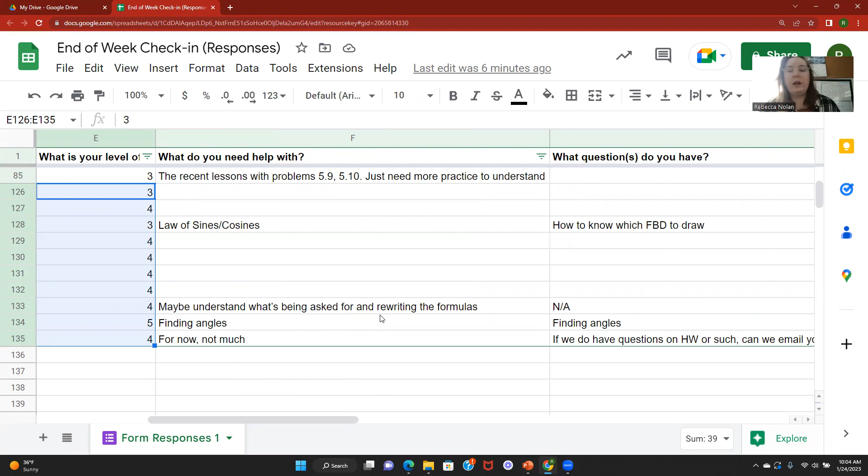Being asked, what's being asked for in rewriting the formulas - I think that has to do with the problem solving methods. Free body diagrams - how do you know what free body diagram to draw?

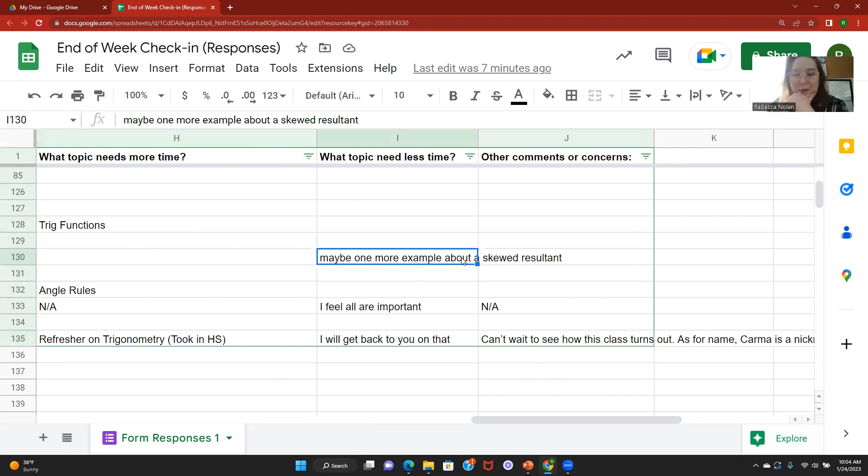A little more review on the trig functions and angle rules. Trig, took it in high school - I think that's the case for a couple people. Skewed resultant, I think this is more time.

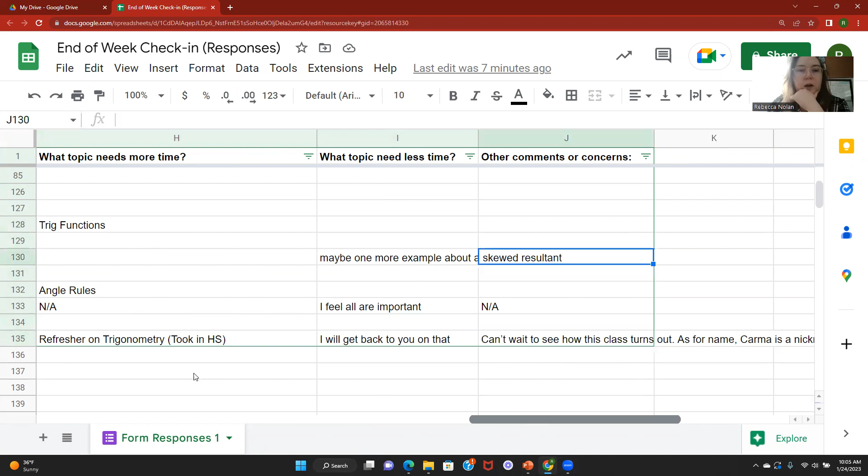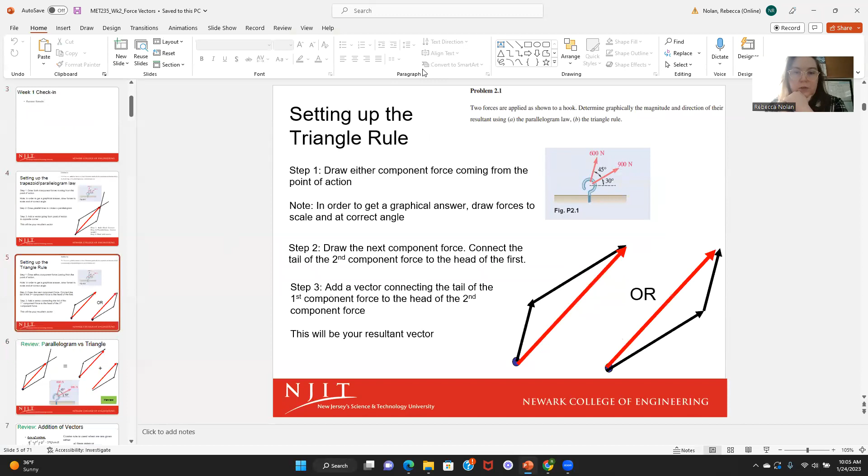Okay, perfect. Let's see, I think I have a few review slides in the beginning. We didn't really have much on setting these up, much in terms of questions on it. So just know that these are in your Canvas slides if you want to see a little more review on triangle or trapezoid - I think that was also in our last week's slides as well.

Okay, when we look at this - I mentioned in class that when we look at R equals P plus Q, the second line here, those should all have that vector symbol on top of it, just that line. That's saying that we're taking into account both magnitude and direction.

Our law of cosines, the way we write it standard, most often, and the way we'd see it on probably a test, and most often on our homework, is R squared - meaning our resultant squared - equals P squared plus Q squared minus 2PQ cosine B. P and Q are our component forces, and B is the angle - B or beta, sometimes I'll go back and forth between the two. It's the angle opposite the resultant.

If we were looking for - if we had all of our side magnitudes, and we had, say, angle A instead of angle B, then we could set up our equation as Q squared equals R squared plus P squared minus 2RP cosine A. So you can move that around - if you had this angle but were looking for a different side, you'd have to rearrange your equation and so on.

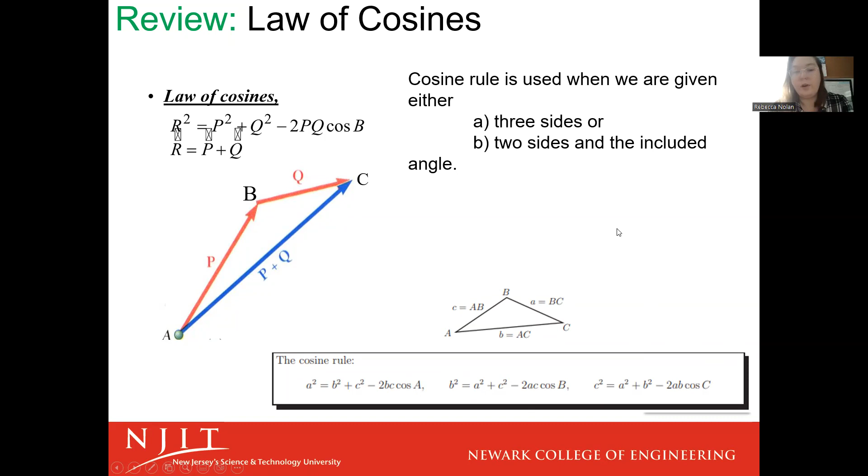We wanted to see a little more of this, so here's the different versions. If you were to have B as the resultant force, usually our resultant force is going to be larger as long as our magnitudes are complementing each other, and the other two vectors are complementing each other. This middle one is the one we're most used to seeing, but we could see it in other formats for other angles.

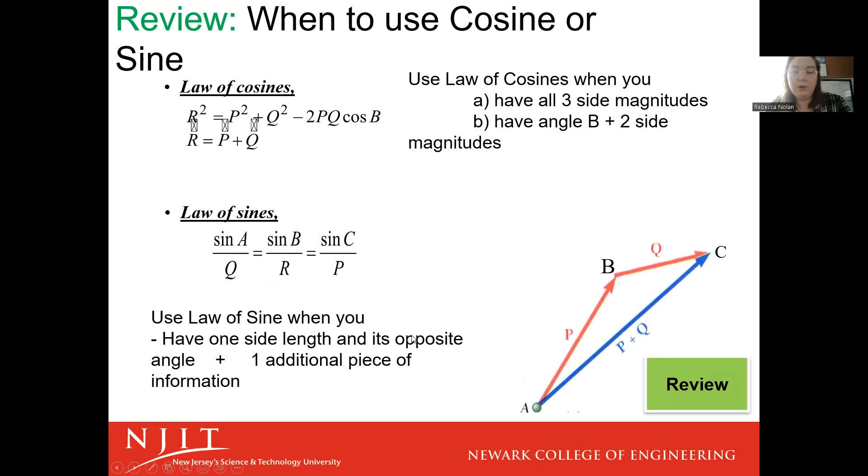The law of cosines. Let's see if we can get a problem with one of these things, and see what we have at the end.

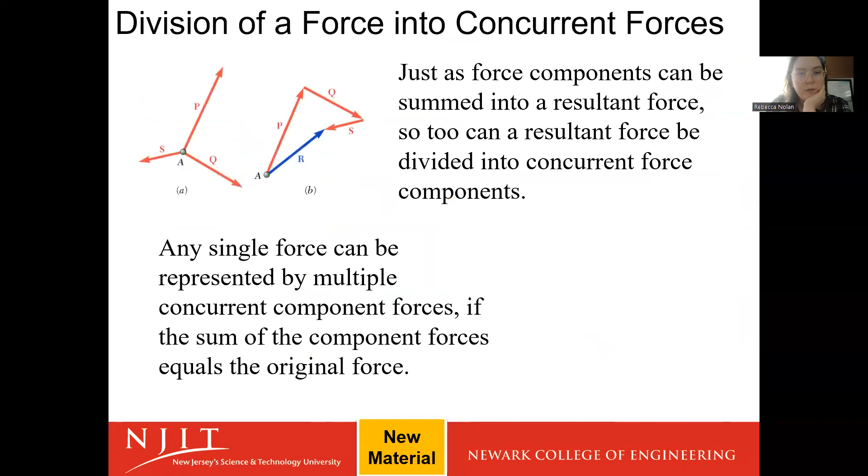I'm just going to keep going in order of the slides. We can revisit law of sines and law of cosines to go deeper. That may be a Friday thing.

We mentioned when talking about our Cartesian coordinate system, that's our standard X and Y, that we've talked about things going completely in the X direction, completely in the Y direction, or some combination of both.

We were also talking week one about taking component vectors and adding them to create a resultant vector. Now picture we can do the opposite as well—we can go from one resultant vector, a combination of two other vectors, into its two parts. An example that comes up frequently, making it easier to solve problems, is to break a force into its X and Y components.

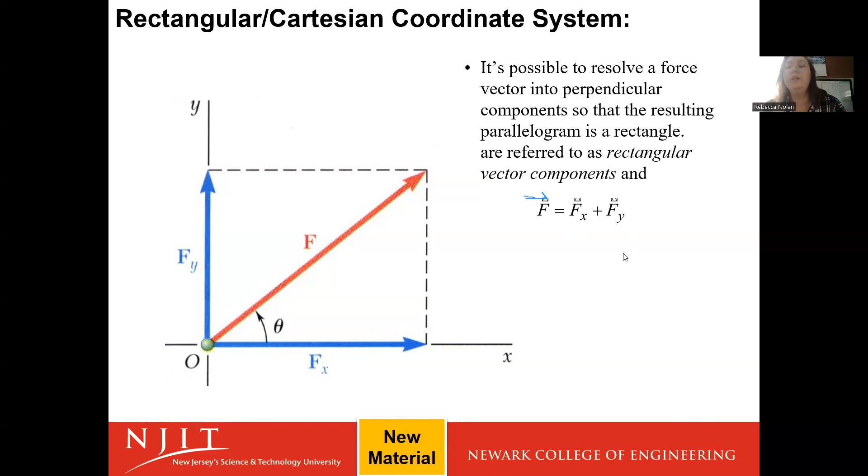Picture all these X boxes to be that vector symbol—let's see if I can make that symbol. So the force vector is equal to the force along the X direction vector plus the force along the Y direction vector. We can break that up further by assigning what we call unit vectors.

Unit vectors—you might remember them from math class. Our I vector is going to be our X vector. This first vector symbol is just your generic vector symbol, like the forces we saw earlier. The other symbol you might see that is an I as well is like a little hat, and that's the symbol for a unit vector.

A unit vector has a magnitude of 1, so really all it's telling us is a direction, not a magnitude. Our I is our X direction, and our J is our Y direction. You'll see me probably interchange the symbols on top, and sometimes even forget it, but that's the technical difference between those two.

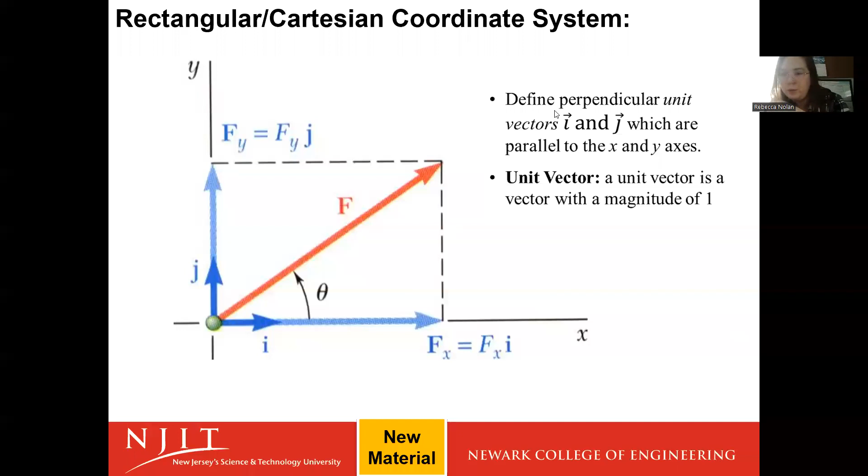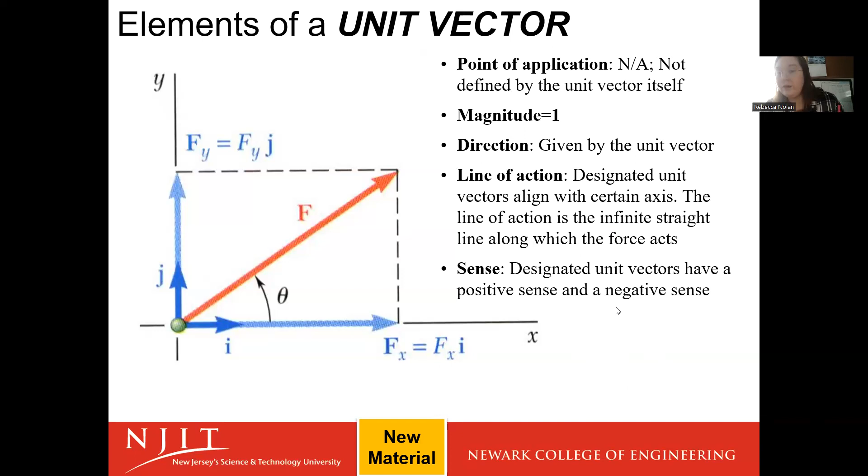A unit vector gives us a direction with a magnitude of 1. So if we multiply anything by the unit vector—say we have a magnitude of force, the strength of a force—the unit vector would apply that direction to that magnitude. So if we had a 100-pound force in the x direction, we'd say 100 pounds is the magnitude, and I would be your unit vector, giving you the directional information.

This is the most common thing you'll see. I caution people about the XY component method, which is basically breaking forces up into their X and Y elements. That way we can sum the X elements, sum the Y elements, and see what their resultant force is—it's another method to find a resultant force. So how do we break a force into its X and Y directions?

One element is using trig. I caution you to be careful with the equations on this sheet, because these are only going to apply if you're working in the first quadrant—meaning positive X, positive Y.

Okay, that's not true either. So if your angle is from the positive X axis, then it will work. Let's say you had a 45-degree angle here, it's gonna work. Let's say you had a 90-degree plus 45-degree, what would that be? 135-degree angle. And if you were to put 135 in this angle information, that would still give you a correct answer.

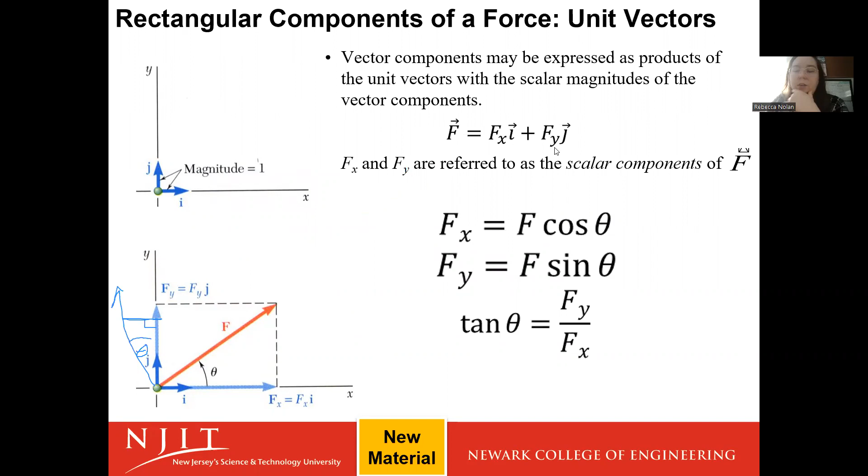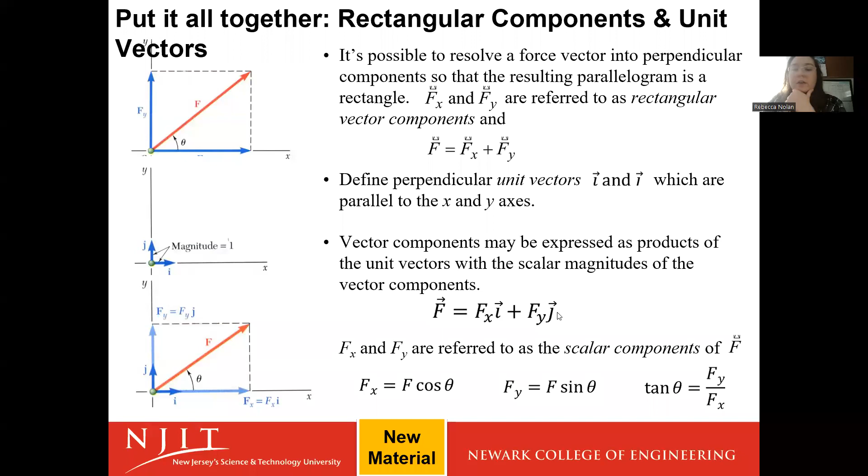So here would be our format for saying that our force vector is equal to the magnitude of the force in the x direction along the x vector, which is our i vector, plus f sub y, which is the magnitude of the force along the y direction, times j, which is the y vector.

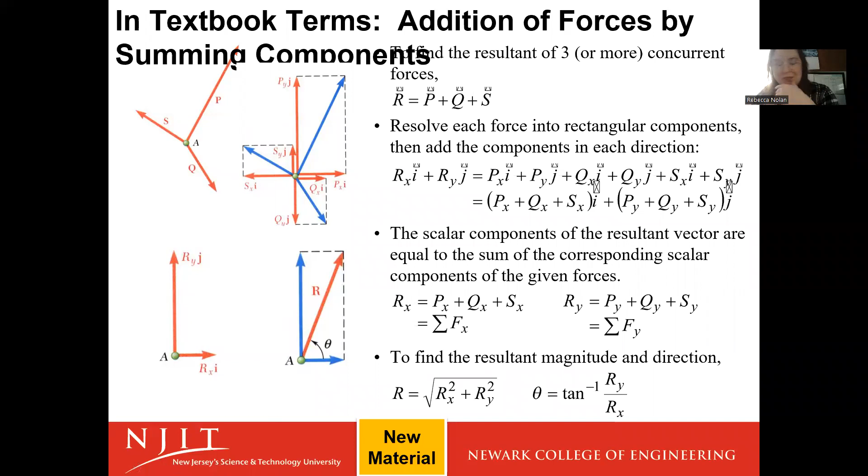We're also going to need to find the angle of the resultant force, and you're going to have to use your trig for that. Be careful, particularly with this one, because based on how trig works, this is going to give you a value in the first quadrant. My goodness, you guys. Okay.

Okay, so that's our free body diagram. Our haves and our needs in this case: what we have is all of our component force magnitudes and directions, and we need to find the resultant force.

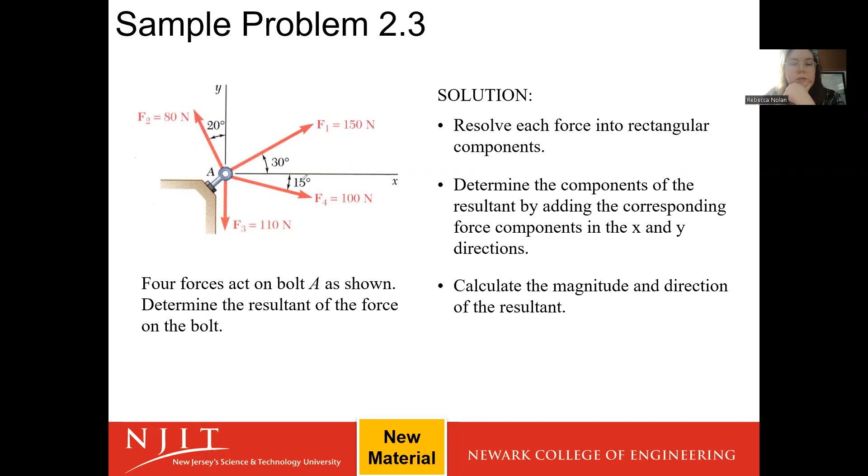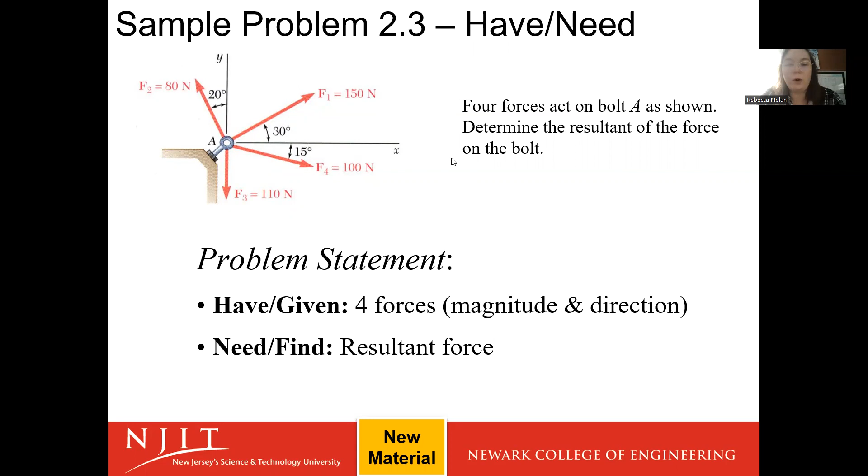So using the XY component method, we're going to break all of these forces up into their X and Y parts. I go real into detail on this one just so you guys can follow it when I'm not around. I like tables for this particularly, just to keep everything straight.

And then the resultant force—so right here, this table is the force. What force vector are we looking at? F1, F2, kind of the name of it. The magnitude, what's the amount, the strength. The X component and the Y component—you would then use your magnitude and the geometry of where it's going to find those components.

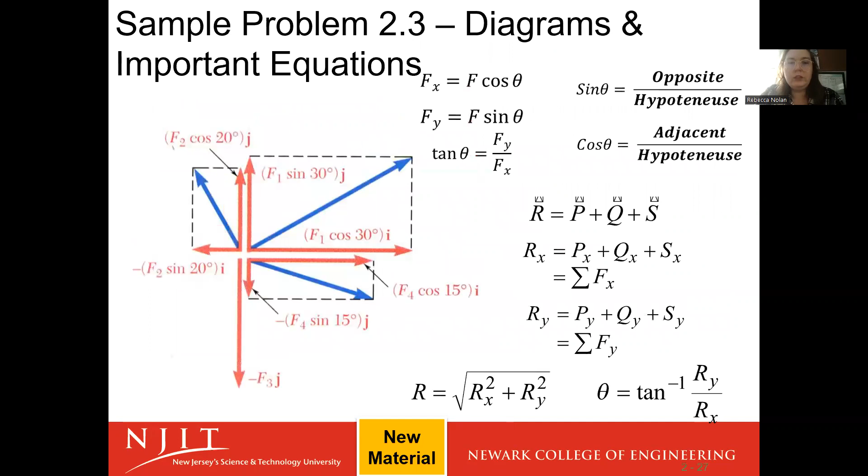So let's go to our first force, F1. F1 is 30 degrees above the x-axis. The magnitude is 150. And what did we want to find? The x and y directions. So we can use our trig. In this case, because it is our first quadrant, we can just use those equations to find the solution. Any questions on that?

Okay, for Force 2, which is in the second quadrant, we would not be able to just use our trig if we were to use 20 degrees. We could use these equations if we were to do 90 plus 20, so that would be 110 degrees. Some students do that—that's usually what I would do as well, just to do the angle from the positive x-axis. But the alternative option would be to create a triangle: this is 80 degrees, this is 80 newtons, 20 degrees, and that will give us enough information to find our x and y elements. Questions on that?

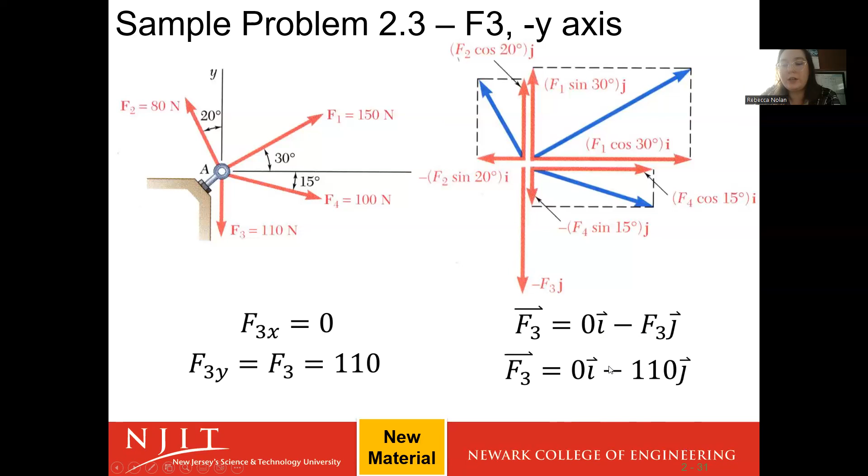F3 is probably the easiest one, or the most intuitive. It is going completely along the negative y-axis. There's no x element, so the magnitude of the x element of F3 is 0, and the y element is the full magnitude of the force, which is 110 newtons. So this would represent the vector notation of Force 3. If you ever hear me say the term vector notation, that's kind of what we're talking about, where it's our x and our y. And then if we're talking 3 dimensions, you're going to have a third there. We're not quite there yet.

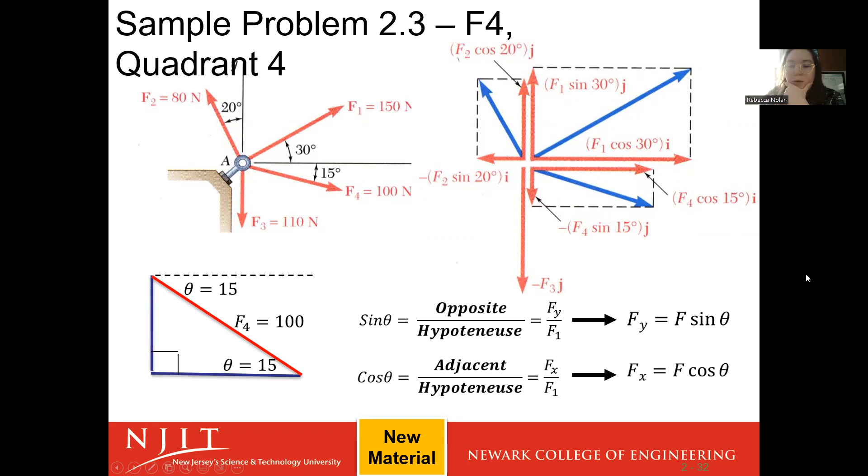So what I would do for F4 is I would do a negative 15 degrees, and then your trig would work out just fine. The other option would be 360 minus the 15, or you can do the triangle with 15 and kind of logic out what goes where. Questions up to here?

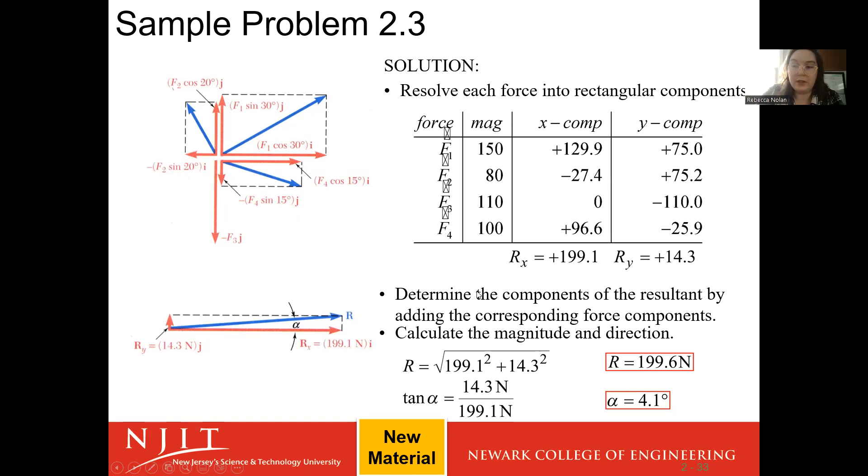Okay, so once we have our table filled out with our forces and their x components and their y components, we can sum our x components, sum our y components, and that gives us our resultant force x and y components, which gives us the opportunity to create another right triangle, where we can calculate the magnitude of the resultant force and the angle of the resultant force. Again, be careful with the angle—what angle is this tangent giving you? Because if we're not in the first quadrant, you might have to add something to that. Any questions? Cool.

We started talking about equilibrium a little bit last week. Equilibrium means that all of your forces are balanced, that you're not being pushed in any direction more so than any other direction. So your x components are going to sum to 0, and your y components are going to sum to 0.

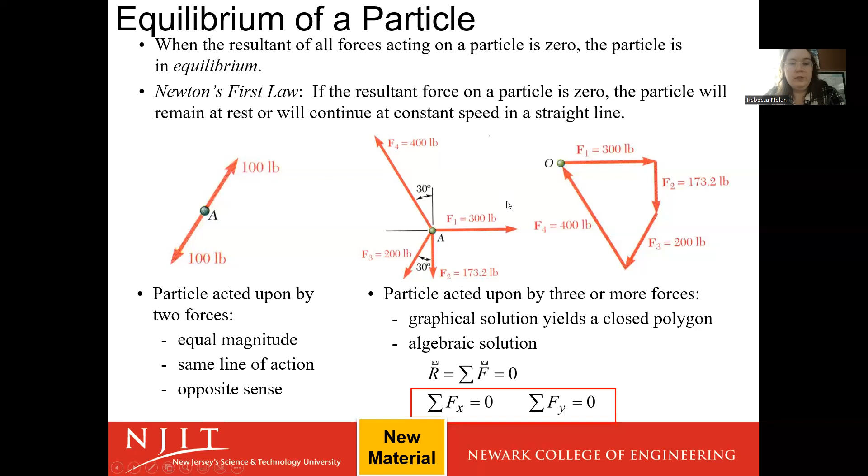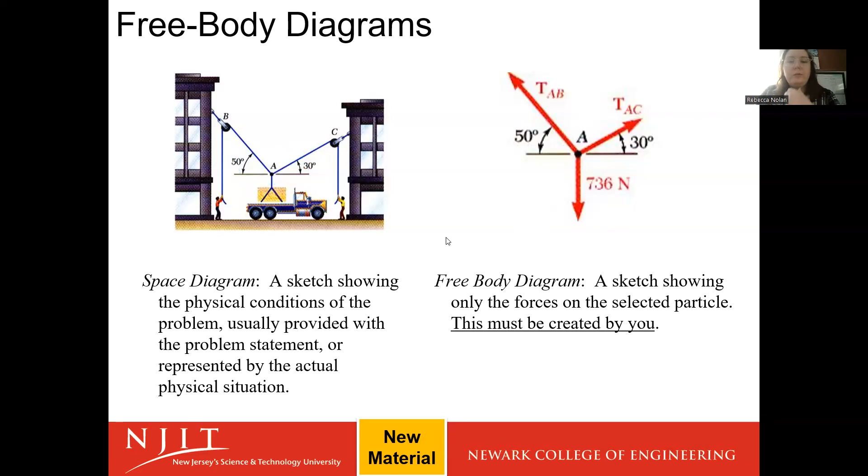Any questions? I am going to skip ahead of some of this and see what else we have. Let's look at this one, because I have this one pretty clear.

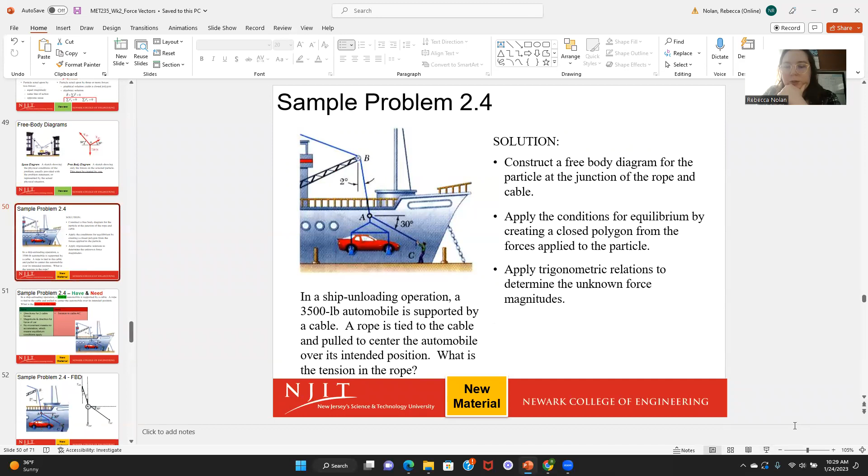So we have a ship unloading a car. It's unloading a 3,500-pound automobile supported by a cable. The rope is tied to a cable and pulled to center the automobile over its intended position. What is the tension in the rope?

I don't feel like they really said it very clearly in this one. I'm assuming, since this class is statics, that the rope pulled the car to the center, and we're now holding that car in the center. So our car is not moving. Our car is in equilibrium.

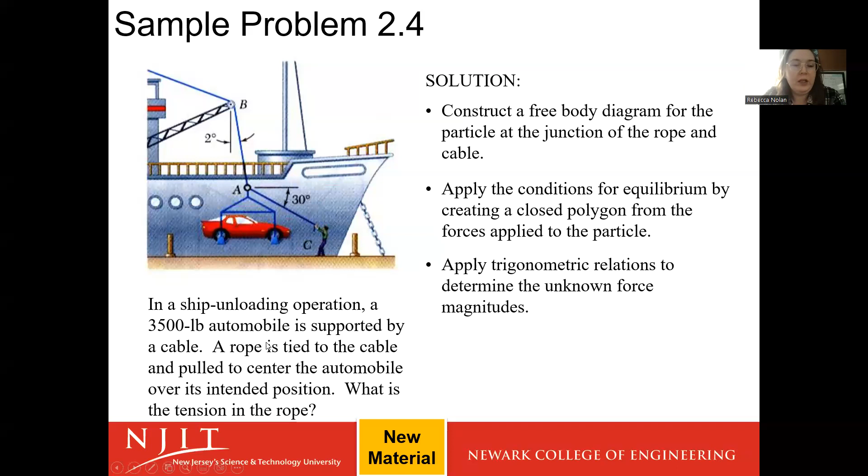Usually it's a little more clear in the wording, but this situation is in equilibrium, meaning all of our forces are going to be balanced.

Okay, let's start with what do we have, what do we need? So in our problem statement we have the weight, the downward force, the weight of the car. We need the tension in rope AC, AB, and then we have the direction of both of those forces. So we have magnitude and direction of one force and direction of two forces.

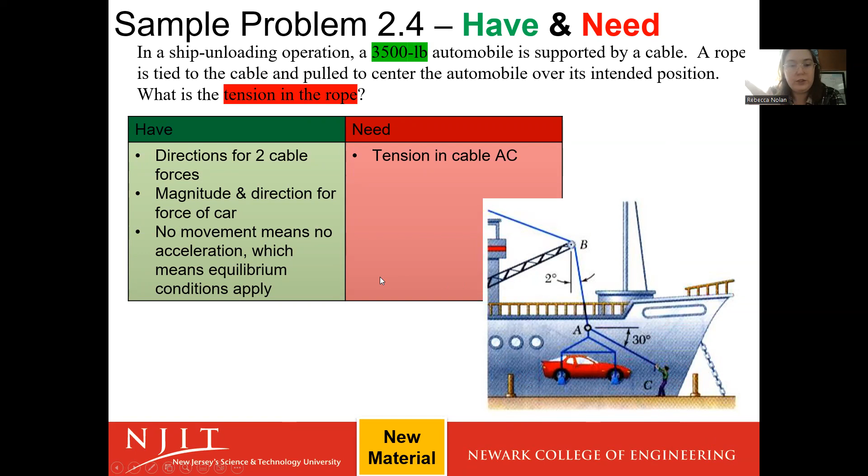Our free body diagram would have point A. The tension of AC is going where that person is pulling that car, at 30 degrees below the x-axis. Weight of the car is completely in the y direction, or the negative j direction. And then we have this force over here, and this is that zigzag alternate interior angles that we've been seeing a little bit of.

Okay, questions? Cool. So now, if we were to take our points, there's two ways to use the triangle rule.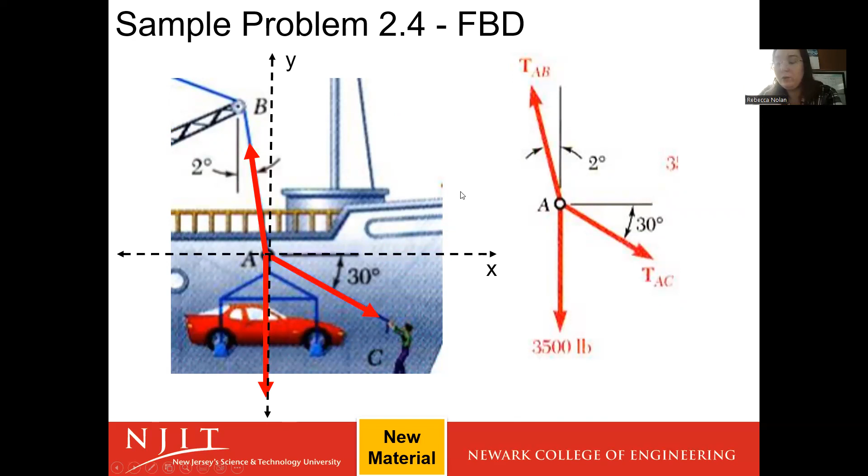The triangle rule that we talked about last week. The first way to use the triangle rule is to find a resultant, which is what we did last week, where our two component forces were going in one direction, and we want to find the resultant force.

When you have something in equilibrium, it's going to create a closed polygon. So if you're trying to find a resultant, the resultant would be what's keeping you from being in equilibrium. So that is going to be what closes the polygon. That was our first method.

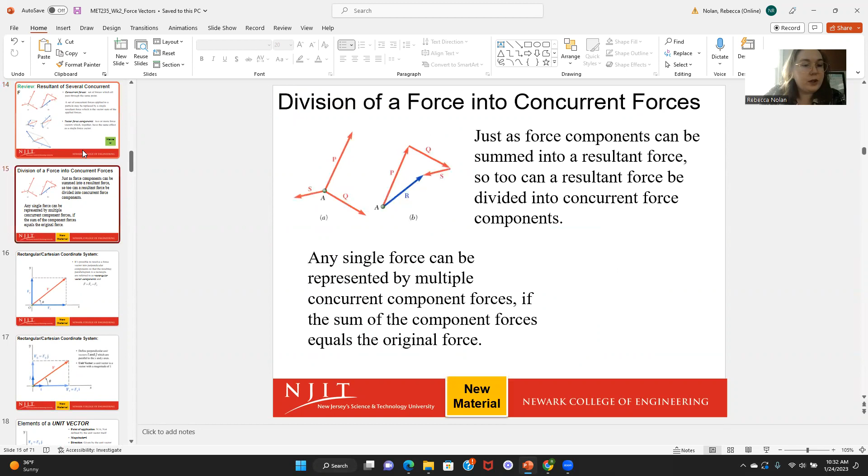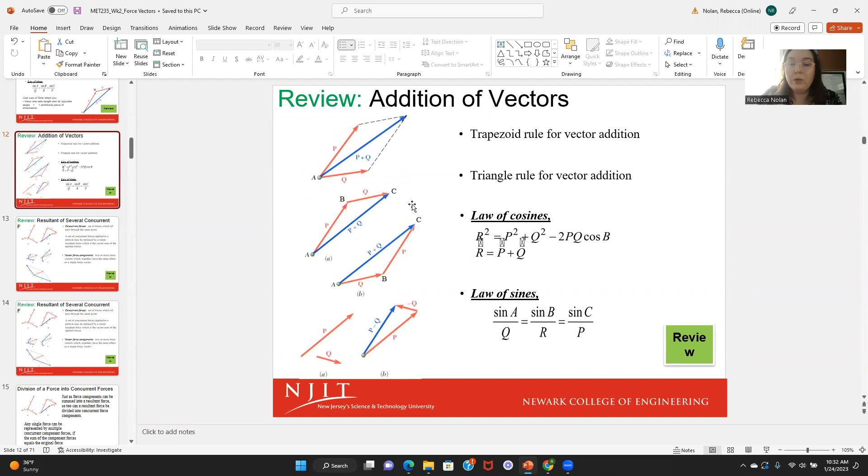So in our first method, you're trying to find a resultant. You're going to see two component directions going in like the same direction, kind of, going head to tail. Two component forces going head to tail, and then the resultant force goes from the tail of the first to the head of both of them. So that's our first method.

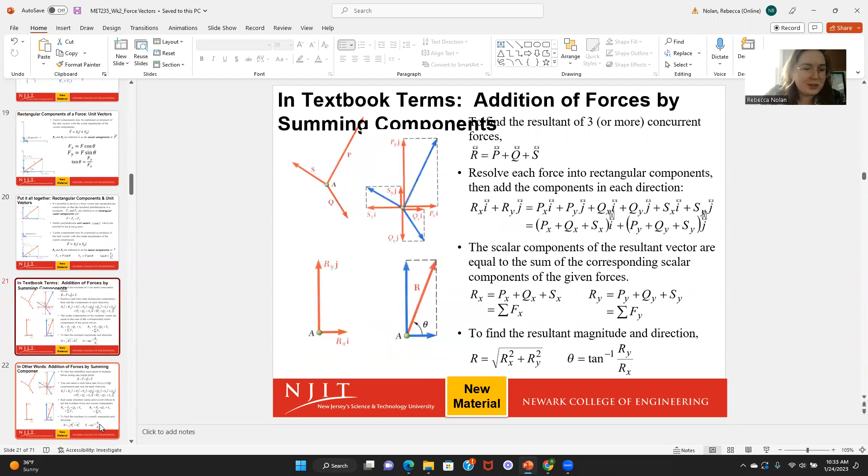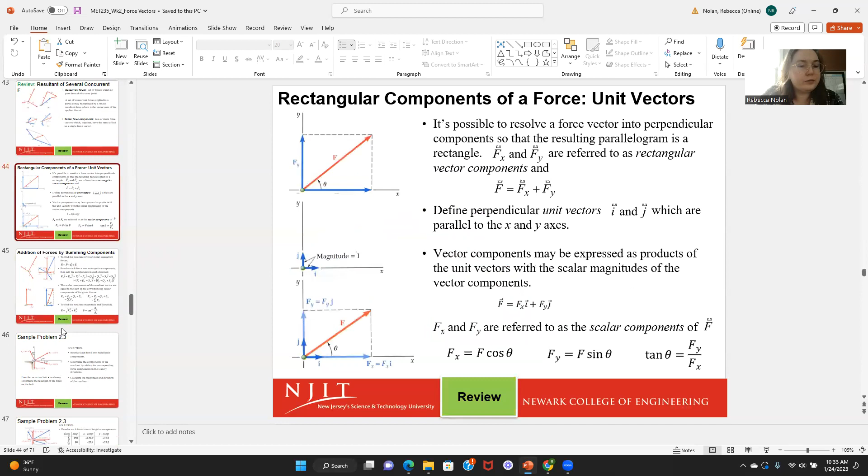I'm going to say all of this again on Friday, just so I can be more animated and use the board. But the second way to use the triangle rule is if you have something in equilibrium, you know it's going to create a closed triangle. Where was that question? Here it is.

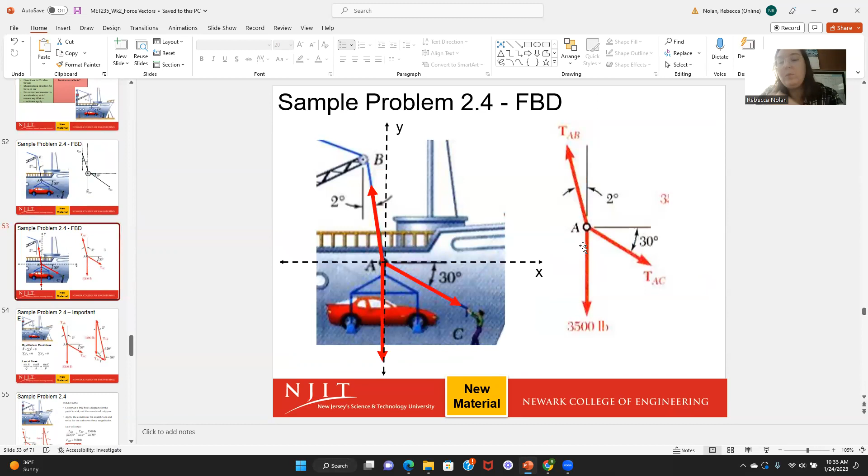So when we have a situation where we're using the triangle rule in equilibrium, we're going to have all of our forces go head to tail in complementary directions. So it's either going to go all counterclockwise, or all clockwise.

In this case, I like to start with anything that's completely in one Cartesian coordinate vector direction. So start with that 3,500, then tack on whatever is easiest. If you were to put this one next, then your AC would still bring you back to create that other half of the triangle. But that'll create our triangle for us there.

Let's see if we can get the geometry here. Since this A is... I know there was a question about another skewed vector. I'm not going to do that today, but I will find a question for that, for like if this 3,500 was a little bit skewed, but it's not.

So the angle between TAB and that 3,500 is going to be the same as the angle between TAB and that y-axis. That's where we get that 2 degrees from. TAC is 30 degrees below the x-axis, so this would be 30. And then this would be 90, and that would get us our 120.

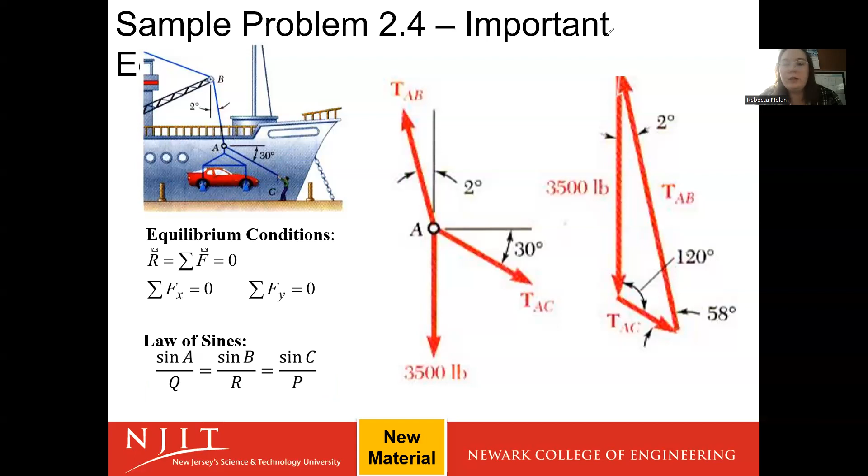And the sine of 58 over 3,500 is equal to the other two proportions. And here is that worked out. Any questions on that?

Okay, I think let's do this one in class on Friday. Any questions? Is there anything else you guys need from me today?

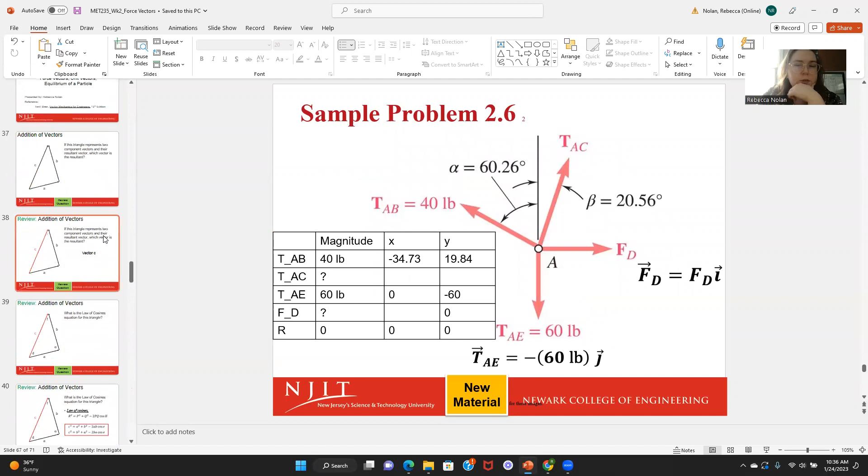Is the homework that's due next week from the book or is it already on Canvas? It is on Canvas. I think you should be able to find it in the book as well.

The only reason I'm asking is because, hold on, let me turn my camera on for a second. The only reason I'm asking is because I've been doing a lot of spending for other classes, and it's going to take me a bit before I actually get the book itself. So, no, yeah, no, it's all available online.

I don't even remember what year it is though right now. Clicking the wrong classes. 23, 2, there we go. I haven't got all of them up yet, but you guys should see at least 1, 2, and 3.

And if you click in, there's a zip file that has the questions in it. So you don't need the textbook for this class. It is an open book class, or open book tests. That being said, I don't know how much the textbook helps, because most stuff should be in the slides and notes. I also know you have free printing.

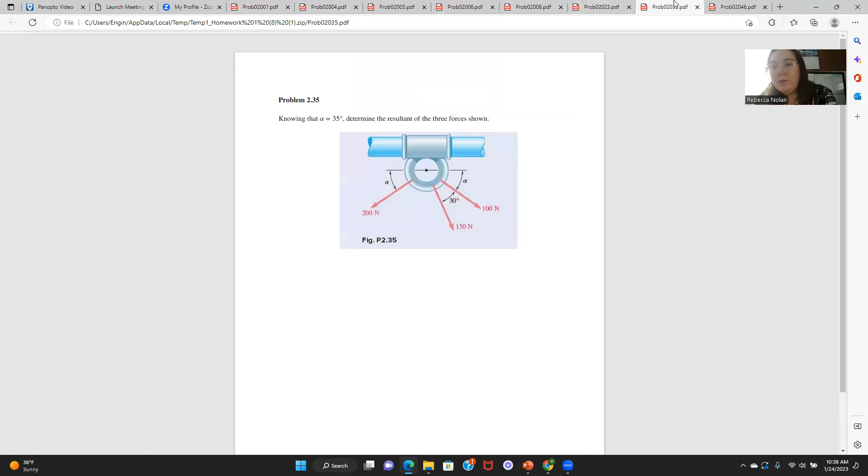So usually somebody in the class is able to find a PDF version of the textbook, and then you can print out any pages that you think might help. Some people do still buy the textbook just because that's how they learn better, but it's not required.

I've tried to find a PDF online. I've tried a lot of different sites, and they always usually lead to a different site or potentially a virus, so I tried myself. Natalie was able to find the PDF. So if you could send it, that would be a godsend, because I tried and I almost destroyed my devices. I can't have that happen.

Yeah, I don't think I can facilitate the exchange of it, but yeah, her email is right here. Thank you, yeah.